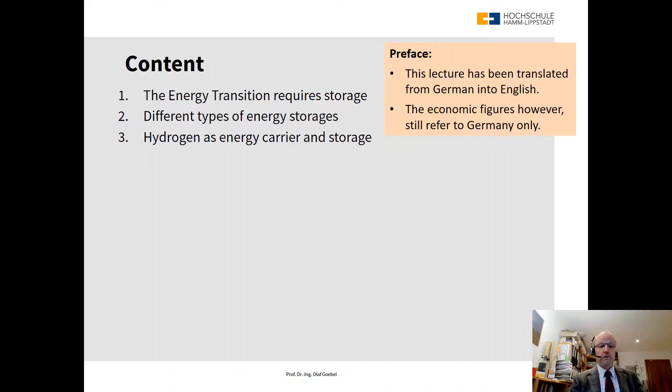So, to the content of this speech: first, we will see that the energy transition requires storage. We will look at different types of energy storage, at hydrogen as an energy carrier, the properties of hydrogen, the production of hydrogen, the utilization of hydrogen, road transport, the role of hydrogen in the energy transition, and the conclusion.

One important thing: I have translated this lecture from German into English because there was a request from my international friends that they would like to hear it in English. So I did the translation and will hold this lecture in English. However, the figures still refer to Germany only, meaning all the economic and technical figures use Germany as an example country. If you want similar data for your own country, unfortunately you have to dig out that data yourself.

All right, let's get started. The energy transition requires storage. Let's look at the net electricity generation in Germany in 2019: 513 terawatt hours was the net electricity generation, and almost 50%, 46%, came from renewables. The largest share came from wind, then biomass, photovoltaic, and hydropower. The remaining electricity generation was from natural gas, nuclear, lignite, and hard coal.

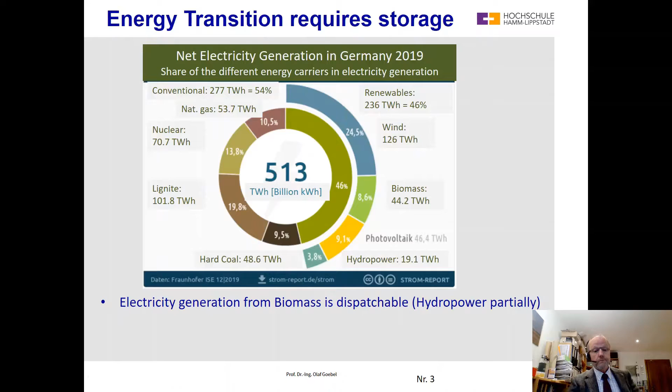Looking at the renewables: electricity generation from biomass is dispatchable. Hydropower is partially dispatchable - run-of-river plants are not dispatchable, but those with storage lakes are. Unfortunately, electricity generation from wind and solar is fluctuating, and only wind and solar have further potential in Germany. Hydropower and biomass don't have further potential because there is no additional area available for either.

So let's look at the different sectors of energy. We have electricity generation: of the gross electricity generation, we have 41% renewables. The traffic sector is 5.6% renewables, stagnating. Electricity generation is increasing every year, the percentage. Traffic sector is stagnating at 5.6%, and the heat sector is stagnating at 15%.

So here you see over the time from 1990 in the last 30 years how the electricity sector really picked up speed and is continuing to grow. In the year 2020, we already passed the 50% line with renewable electricity generation in Germany. But as you see here, traffic and heat sector are stagnating.

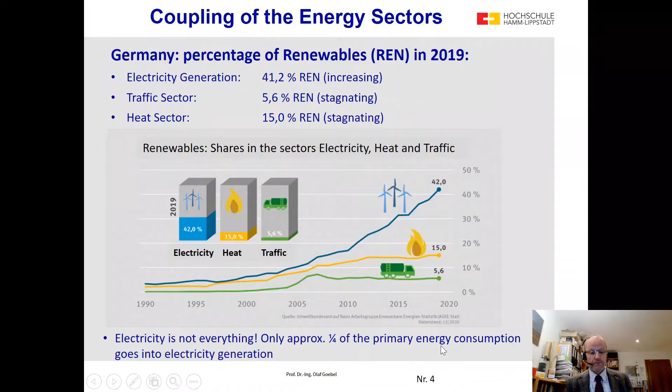So, electricity is not everything. Only approximately 1/4 of the primary energy consumption goes into electricity generation.

So let's look at the primary energy consumption of Germany. Here the renewables are not as big as they were in electricity generation only. If you look at the complete primary energy consumption of Germany, there were only 14% renewables, and the biggest share was oil, then natural gas, hard coal, lignite, nuclear.

Within the renewables, biomass was the biggest, which is biomass for heating systems - that means it's also including wood firing. Then here is the electric, which is wind, hydropower, and photovoltaic.

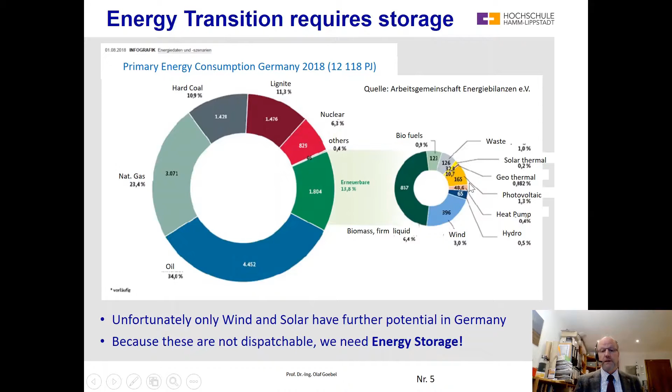As I said before, unfortunately only wind and solar have further potential in Germany. And because these are not dispatchable and they are fluctuating, we need energy storage. So energy storage is a must if we want to increase the share of wind and photovoltaic to significant percentages.

So let's have a look at some energy storages. I always notice that people have a little bit of trouble understanding what an energy storage is. A very simple energy storage is this little toy where you have to wind up a spring, and then this toy operates for a few seconds. This spring energy storage stores an energy of approximately 10 watt seconds, which is not a lot.

Then these typical rechargeable batteries, which we all know - in this example, it has 1.2 volt, 1.3 ampere hours, so 1.5 watt hours. But be careful when you compare this: this was watt seconds, and this is watt hours. So 1 watt hour is 3,600 watt seconds. In the end, this battery has 500 times more energy than this spring.

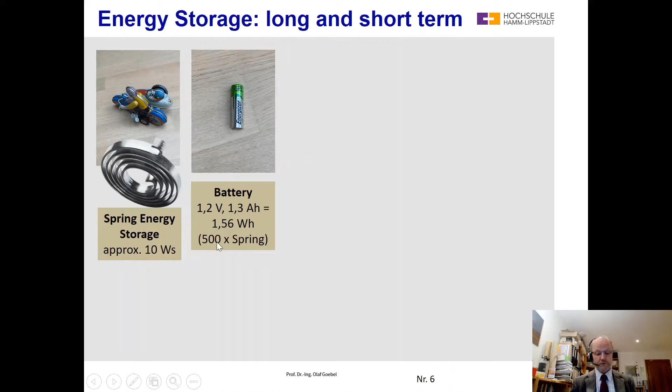I think this is pretty obvious because when you wind up such a toy, it runs for 10 seconds, and with a good battery, such a toy could really run for more than an hour. So this is why it has 500 times more energy than the spring.

Let's look into the next bigger system, a starter battery for a car. I think we still all know this system - these are the batteries used for starting our cars. This, for example, has 12 volt and 50 ampere hours, and volt times ampere is watt. So that means the energy content of this battery is 600 watt hours, or 0.6 kilowatt hours. This is again 384 times more than the previous battery.

Next step, we look into a fuel tank of this motorbike. Of course, the output of fuel is not directly electricity, but it is an energy storage. This tank fits 10 liters, and the energy content of 1 liter of fuel is approximately 10 kilowatt hours. When we have 10 liters, we have 100 kilowatt hours in this tank.

And let's look back to the battery - it had less than 1 kilowatt hour. That means we have 160 times the energy of the starter battery here in this tank. This shows, I think, pretty clearly why electric driving with lead acid batteries like shown here is not really an option. Imagine with 160 of these batteries, this motorbike would break together and couldn't run. By the way, going back to the spring, this is 36 million times the energy of the spring.

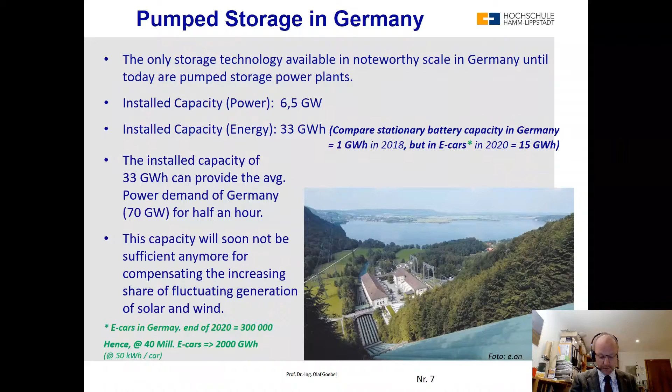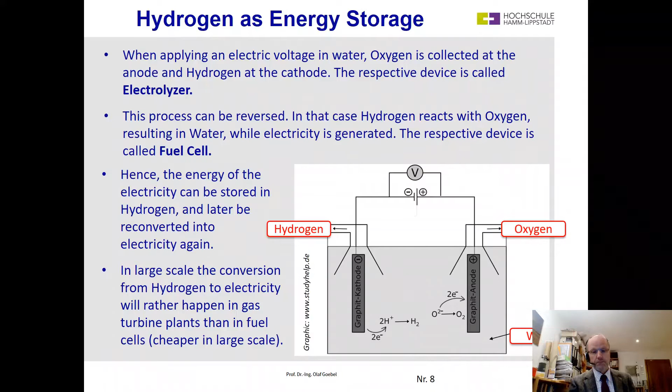So let's look at strengths and weaknesses of hydrogen as a storage. One big strength is the following: when you want to double the capacity of a battery, you either need 2 batteries or 1 battery of double size. The double battery has also a double price. Hence, a storage for a month is 30 times as expensive as a storage for a day.

This is different with pumped storage and with hydrogen storage. Here you don't need to increase the capacity of the inverter, but only the capacity of the energy storing medium, which is hydrogen or water. So at a pumped storage power plant, the pump and the turbines stay unchanged if you want to increase the capacity. Only the water pools need to be enlarged, and they are not the most expensive part of the plant.

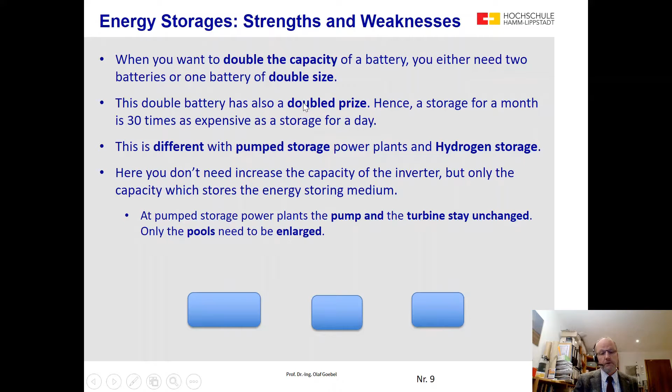So with batteries, if you want double the size, you need 2 batteries. If you want 30 times the size, you need 30 batteries. With pumped storage, you can keep the pump, you can keep the turbine, you only need bigger pools. And with hydrogen, the electrolyzer and the fuel cell or gas turbine stay unchanged—only the hydrogen tank needs to be enlarged.

So let's look at the system again. We have electricity, it goes through an electrolyzer, we receive hydrogen, we store it, then we take out the hydrogen, put it through a fuel cell, and we have electricity. Now if we want to double the capacity, we only need to increase the storage.

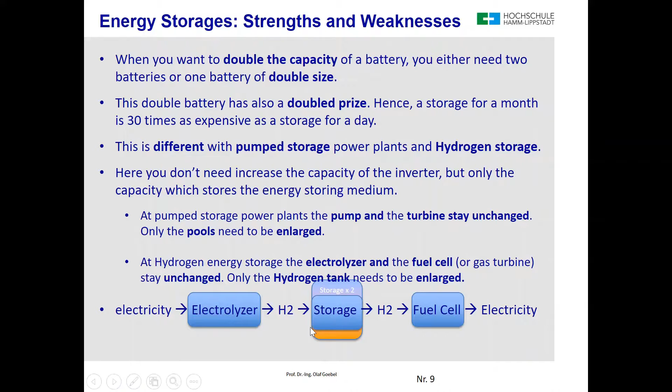And the electrolyzer and fuel cell stays the same. This is why this is so much cheaper for long-term storage, while batteries are not affordable for this. Now comes the disadvantage, the round trip efficiency.

Let's look first into liquid hydrogen, displayed as LH2. So we have a starting point, an electric energy of 100 kilowatt hours. We put this through a very good electrolysis with 75% efficiency, and then from the 100 kilowatt hours, we keep 75 kilowatt hours, which is a mass of 2.25 kilogram of hydrogen.

Then comes a liquefaction, and we need to liquefy this. We need 22.5 kilowatt hours electric, because approximately for liquefaction we need 10 kilowatt hours per kilogram. Since we have 2.25 kilogram, we need 22.5 kilowatt hours electric. Then we have 75 kilowatt hours in liquid hydrogen.

So then we want to reconvert it into electricity. We put this through a fuel cell, or through a combined cycle gas turbine with an efficiency of 60%, which is state of the art. Then 60% of 75 kilowatt hours is 45 kilowatt hours electric. So then we have 45 kilowatt hours.

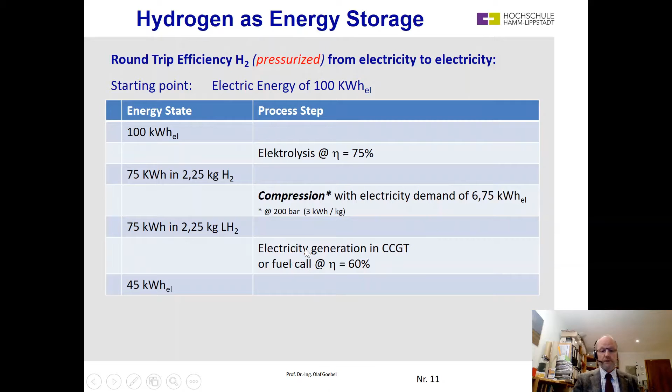And now we compress it to 200 bar. To compress hydrogen from 1 bar to 200 bar, we need approximately 3 kilowatt hours per kilogram. That means in total 6.75 additional kilowatt hours of electricity. So then we have compressed hydrogen, and we reconvert it into electricity like before, and receive 45 kilowatt hours electric.

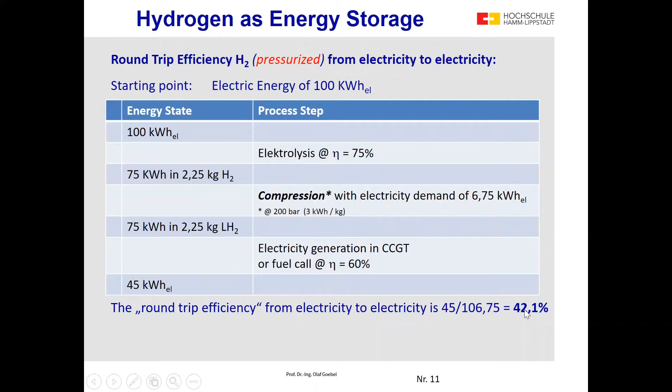And now the round trip efficiency is better because we still get out 45, but our input is lower. Our input was 100 kilowatt hours plus 6.75, and so the round trip efficiency is 42%. But it is still significantly worse than pumped storage or compressed air storage.

So let's look at the general properties of an energy storage system. The three most important properties are the following. First, power: with which power, measured in kilowatt, we can charge and/or discharge our storage. Then energy storage capacity: how much energy, how many kilowatt hours, can we store? And then the round trip efficiency: it describes how much of the original energy is still available after the storage cycle, into the storage and out of the storage.

With some technologies, the first two properties are connected with each other, for example with batteries. That means when you have a higher power, usually you also have higher storage capacity. With other technologies, this is not connected, as we saw before with pumped storage or hydrogen. That means here we can increase the storage capacity without touching the power, and this is why we can increase the storage capacity at very low cost, while with batteries, a bigger storage capacity brings us, if we want it or not, also an additional power.

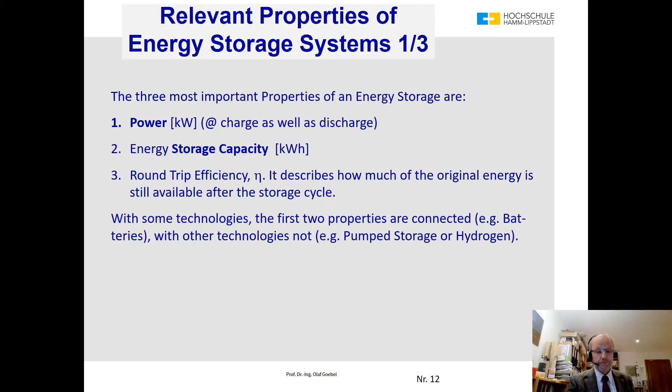So other further important properties of energy storage systems are the cost, of course, power specific: how much euro per kilowatt of charge or discharge power. The cost of energy, that means capacity specific: euros per kilowatt hour of storage capacity. Then, of course, the working lifetime. There are two parameters: one is the lifetime in years, and the cycle durability, how many cycles can the battery survive.

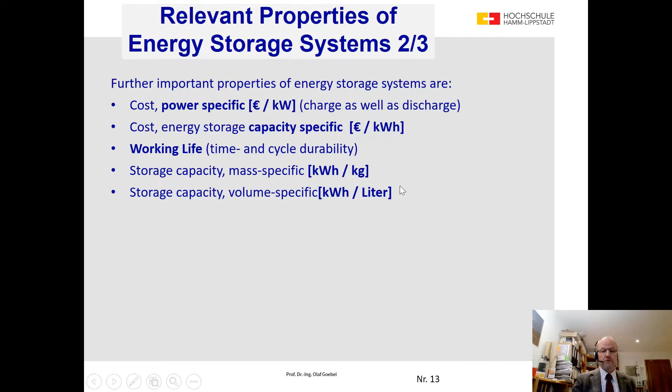Then, which is especially important for transportation systems, the storage capacity mass specific: how much energy can we store per kilogram of battery or storage system? And then volume specific: kilowatt hours per liter of battery volume. So these two are especially relevant for transportation systems, in cars and trucks.

The ratio of energy storage capacity to power determines the application as a short or long-time storage. The following list shows different storage technologies sorted according to their duration in ascending order.

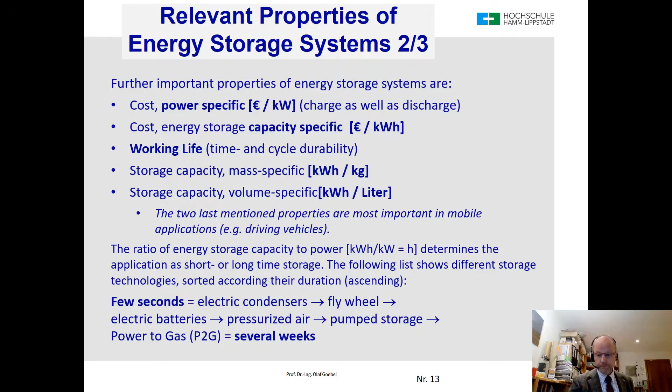So let's look at pumped storage. It has a round-trip efficiency between 70 and 80%. The lifetime is very long, 50 years plus. The price per kilowatt is around 1200, and the price per kilowatt hour can be as low as 20.

The costs are strongly dependent on the local geographic conditions, for example existing lakes. The first pumped storage plant in the world was built in Bavaria in 1924. It had two natural lakes where they only had to build the turbine, pumps, and pipes. Of course, in such a system, it can be pretty cheap.

In some other places you have to build one of the reservoirs, which makes the system expensive, and that's why the cost here is higher than 20. But 20 applies to those plants with very good boundary conditions. So remark: this is definitely state of the art.

Pressurized air, when done adiabatically, has 75% efficiency, which is pretty good. Lifetime is also pretty high. The cost per kilowatt is comparable to pumped storage, but the price per energy is definitely higher. There are prototypes, but they are not yet state of the art.

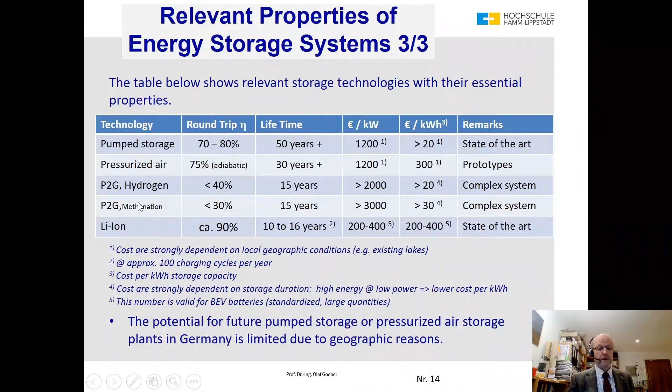So these are the future systems: hydrogen, lithium-ion batteries, maybe future batteries which are coming up soon. There is a lot of research going on now. Or we have power to gas with the methane conversion.

Now let's look into hydrogen itself. This was a little bit of a quick opener into what we can do with hydrogen, but we now look deeper, because hydrogen is the main topic of our today's lecture. So why is hydrogen an interesting energy carrier?

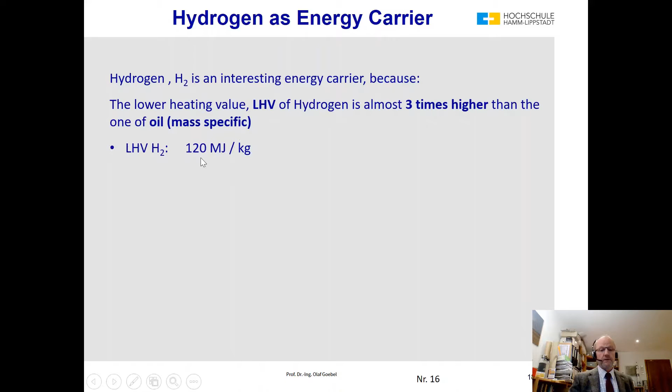Because the lower heating value of hydrogen is almost 3 times higher than the one of oil, mass specific. The lower heating value of hydrogen is 120 megajoule per kilogram. The lower heating value of oil is 42 megajoule per kilogram. Therefore, it is particularly interesting for fuels, for vehicles, because the energy density of hydrogen is higher than that of oil. However, at the end, this advantage is overcompensated by the very heavy tanks needed for pressurized storage. We will also see this later.

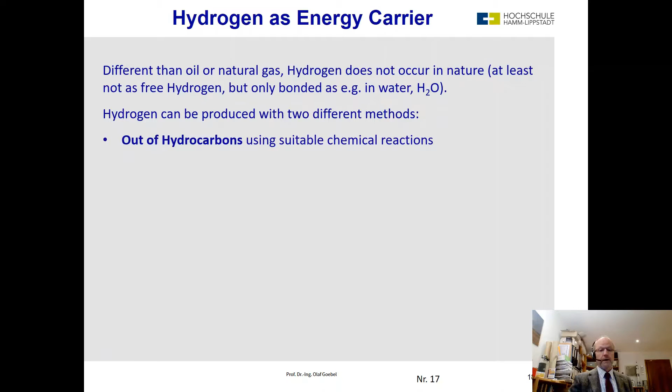There's a very big difference between hydrogen and oil or gas. Different from oil or natural gas, hydrogen does not occur in nature as free hydrogen, only bonded, for example like in water, which is H2O. Hydrogen can be produced with 2 different methods: out of hydrocarbons using suitable chemical reactions, usually with natural gas, or out of water using electrolyzers, which we learned before. However, the share of worldwide hydrogen production with electrolyzers is less than 5%. The majority is still produced with hydrocarbons.

In some chemical processes, hydrogen is generated as a byproduct. For example, the coking process, where hard coal is converted into coke, hydrogen is a byproduct which you should of course catch and use. So it is important to note that hydrogen is not an energy source like oil and gas, which you find ready to use in nature. It is an energy carrier, which you have to produce from another energy source.

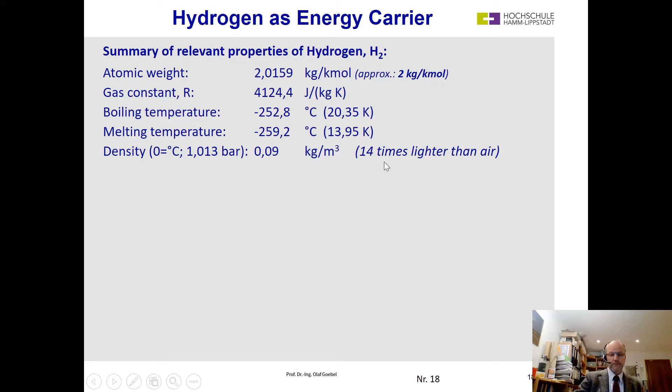So, summary of relevant properties of hydrogen. The atomic weight of H2 is approximately 2. The gas constant is 4124. The boiling temperature is minus 252.8 Celsius, or 20.35 Kelvin. So it's very low. The melting or freezing temperature is 13.95 Kelvin. The density at 0 degrees Celsius and normal atmospheric pressure is 0.09 kilograms per cubic meter, which is 14 times lighter than air. This is why Zeppelins or airships have been flying with hydrogen. The density in the liquid state is 70 kilograms per cubic meter, which is 14 times lighter than water. So it is a very low density liquid.

The heating value is 120 megajoule per kilogram, or in the unit we use more often in the energy business, kilowatt hours. You divide this by 3.6 and get 33.33 kilowatt hours per kilogram, lower heating value. For the volume specific heating value, it is 3 kilowatt hours per normal cubic meter. This N is not a Newton cubic meter, it is a normal cubic meter, which is the volume at ISO standard conditions, that means 15 degrees Celsius and normal atmospheric pressure, as written here. The volumetric heating value in the liquid state is 2.36 kilowatt hours per liter. So you see it is approximately 1,000 times denser than uncompressed gas.

Due to the fact that the volume specific heating value is 787 times higher in the liquid state than in the gaseous state, liquid hydrogen is used as a fuel in spaceflight. So in spaceflight, you use the fact that it has almost 1,000 times higher density. This is why you fill up the tanks of rockets with liquid hydrogen.

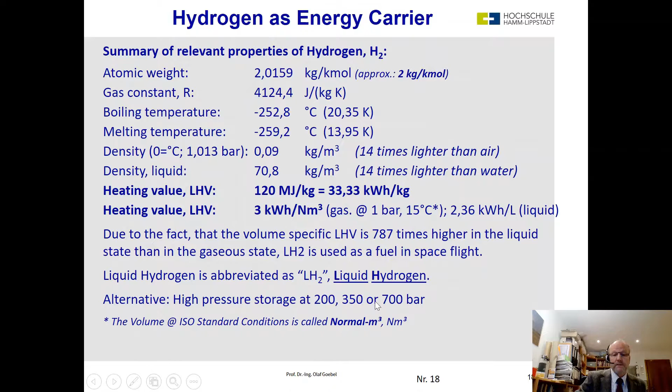Liquid hydrogen is abbreviated as LH2. An alternative is high pressure storage, with common pressure ranges of 200 bar, 350 bar - this is for transport, in tanks of trucks and buses - and 700 bar, which is used in tanks of passenger cars. This has been established as a normal pressure.

So what is the role of hydrogen during the energy transition? The energy transition means the move from the carbon-based system to a renewable energy-based system. As shown above, hydrogen is an energy storage and cannot score in all categories due to its low round-trip efficiency.

However, the energy economy will have to use hydrogen as an energy carrier in the future for the following reasons. Batteries do have a much better round-trip efficiency, but at very large capacities, they are capacity-specific more expensive than hydrogen. That means batteries are not suited as a seasonal storage.

A seasonal storage is a storage which you charge up once per year and discharge once per year. For example, with solar energy, which has a big surplus in summer, you put all this surplus energy into this storage. And then in winter, when the sun is not shining, you discharge this storage.

A battery, which you only charge once a year, is too expensive, because if a battery has a lifetime of maybe 20 years, this battery is working only 20 times, and the high investments need to be paid on the kilowatt hour which is stored there. So that doesn't work, and this is why hydrogen is the only suitable seasonal storage.

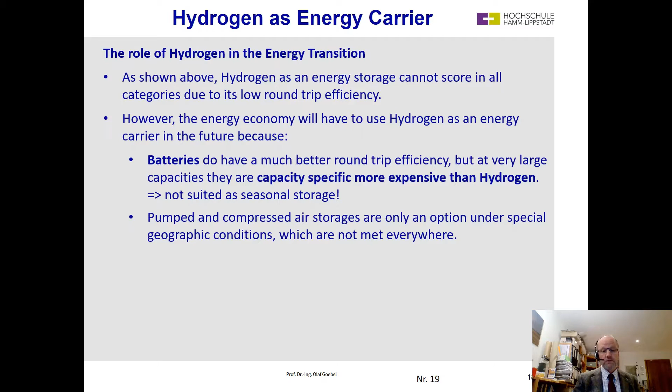Pumped and compressed air storages are only an option under special geographic conditions, which are not met everywhere. One of the best countries for this is Norway, with a lot of water and a lot of mountains. Also Austria and Switzerland are pretty good, as well as the Rocky Mountain area in the United States. But there are many, many places where pumped storage doesn't work.

Due to the fact that in Central Europe the dominant renewable energies, PV and wind, are highly fluctuant, there will be more and more electricity surplus during the summer as the renewable installation rate increases, which it is doing now. This surplus can be used for long-term seasonal storage. The surplus electricity will be cheap, therefore the low efficiency of hydrogen does not hurt as much as it seems at first sight.

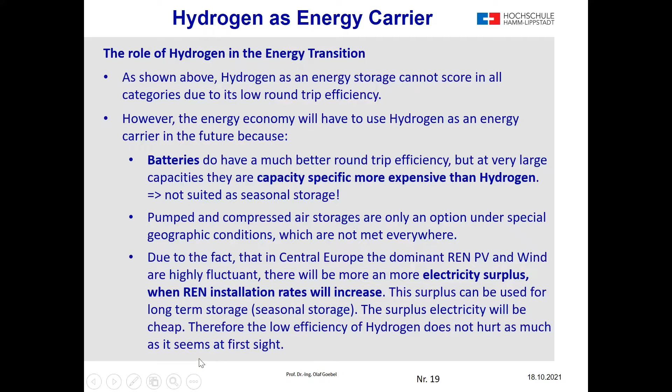So let's continue the role of hydrogen in the energy transition. There will be a certain order in the utilization of surplus electricity. So when we continue to build PV and wind, we will have more often surplus electricity. What can we, or what shall we, do with it?

First is demand side management. This means we need to incentivize electricity utilization in times of surplus, and penalize it in times of scarcity. This way, when there is cheap electricity on the market, people will buy this cheap electricity, and when electricity is scarce, you make it expensive, so the demand will go down. This is the easiest way of using the surplus, but of course you cannot manage all the surplus with it.

The next one is charging of batteries. If all 40 million passenger cars in Germany will be battery electric vehicles with 50 kilowatt hour capacity each, then the total battery capacity will be 2000 gigawatt hours, which represents 28.5 full load hours of the total Germany electricity consumption. So that is for the daily loops.

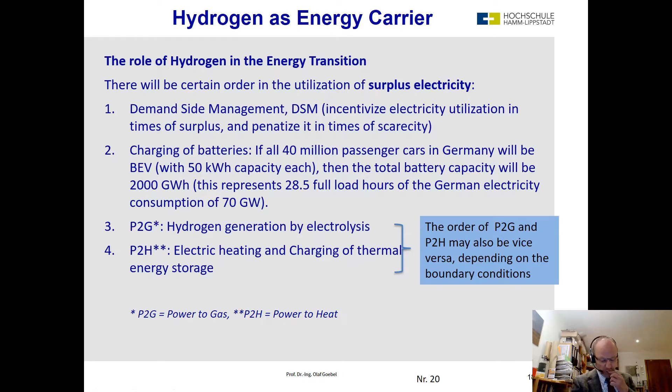Then we have power to gas, hydrogen generation by electrolysis. That means when demand side management has been applied and there is still a surplus, you charge the batteries, and when there is still a surplus, you use the surplus electricity to produce hydrogen with electrolyzers. Or you can use electric energy for heating - we will come to this later. The order here, whether power to gas or power to heat comes first, is discussable, and we will discuss that later during this presentation.

Now comes an important thing, the hydrogen generation costs, abbreviated HGC. The hydrogen generation costs consist of three components: capital cost of the electrolyzer and the complete plant, including the compressors and so on, called CAPEX; then the cost for operation and maintenance, also abbreviated O&M, called OPEX; and the cost of electricity, which we need for the electrolysis. These are the three components.

So the capex is distributed over the depreciation period using the annuity method. That means the interest and payback are in constant rates over the lifetime of the components. The OPEX will be assumed as 2% of the capex per year. This is the typical value for this kind of infrastructure by experience.

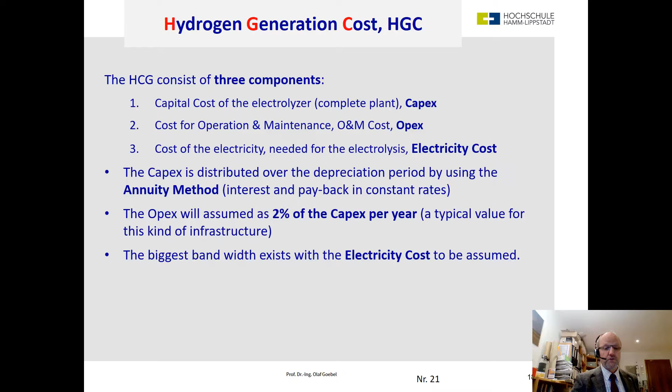The biggest bandwidth exists with the electricity generation cost, because here we can assume really low values or high values. So we will just start with an example, and later we will discuss these numbers, which are realistic and which should be used, because that is not so easy. So let's start and make some assumptions.

So the capex of the complete electrolyzer, the complete plant in large scale, this is not the home-based stuff, this is an industrial electrolyzer, costs 1,000 euro per kilowatt capacity. And with an efficiency of 70%, this produces a certain amount of kilogram of hydrogen per hour. This is also a very common way of displaying the price: 1,000 euros per kilowatt is 48,000 euros per kilogram per hour capacity.

The OPEX, as I said before, is 2% of the capex per year. This is a non-variable OPEX. And for electricity cost, we take an example of 4 cents per kilowatt hour, because this is the average value at the European Electricity Exchange in the years before 2019. It was not last year, since it was very low due to the Corona pandemic. So we take this as an example.

Then we start with full load hours, 4,000 hours per year. And we have some finance parameters: a return on equity of our project of 12%, a debt rate of 4%, a debt equity ratio of 80-20. That means we have a weighted average cost of capital, so-called WACC, of 5.6%. And we have a depreciation period of 20 years.

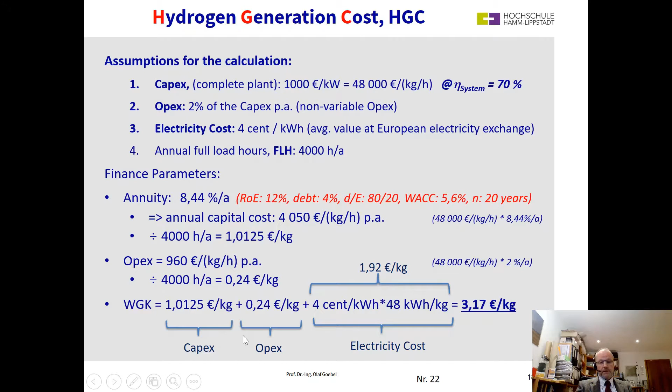And now we add up all the stuff. So the CAPEX plus OPEX plus the electricity cost together is 3 euro and 17 cents per kilogram of hydrogen in our example. So I copy the last line to start the discussion of the hydrogen generation cost. So is that expensive or not? Let's compare it with other stuff.

So hydrogen produced from natural gas with the so-called steam reforming is 1.5 euros per kilogram. And now we convert this to energy. When we remember that the energy content of 1 kilogram was 33.3 kilowatt hours, we can convert this price into a kilowatt hour price, and this is 9.5 cents per kilowatt hour. The hydrogen produced from natural gas here then is 4.5 cents per kilowatt hour, so a little bit less than half.

But now let's compare it with other fuels. For example, diesel fuel. Diesel fuel was in the beginning of the year here in Germany, now it is even more expensive, 1.20 euro per liter.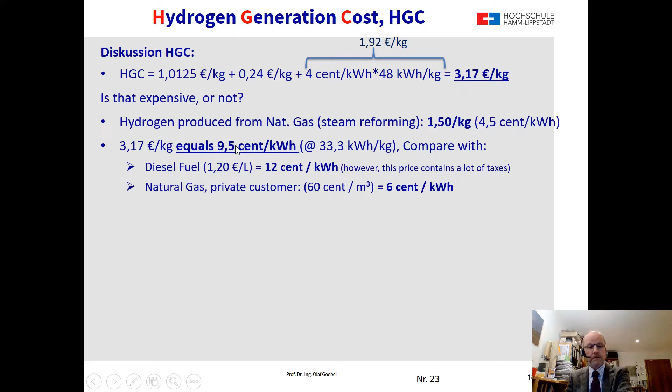Technology engineers know that 1 liter of diesel fuel has an energy content of 10 kilowatt hours. That means the diesel price per liter is 12 cents per kilowatt hour, comparable to our hydrogen price, but this price contains a lot of taxes. Natural gas for a private consumer in Germany is 60 cents per cubic meter, or 6 cents per kilowatt hour, so cheaper than this hydrogen. Natural gas for the industrial consumer is 25 cents per cubic meter, or 2.5 cents per kilowatt hour, much cheaper than our hydrogen produced with an electrolyzer. So conclusion: the hydrogen of the example calculation is cheaper than diesel fuel, but more expensive than natural gas.

However, we should consider that the electricity for the electrolyzer cannot be obtained at the exchange price of 4 cents which we had before. Including grid fees and other contributions, the price will rather be 12 cents per kilowatt hour. So the cheapest price for industrial users of electricity in Germany is 12 cents, because you have to pay certain taxes and fees. If we take this into our calculation, the 12 cents instead of 4 cents, then this fraction here will triple, because 12 is 3 times 4. That means from almost 2 euros to then 6 euros, so almost 4 euros more. This is why we are now at 7 euros per kilogram.

And this is 21 cents per kilowatt hour, even more expensive than diesel fuel. This shows us that we have to make sure that all the electric energy needs to be freed up from all the fees and taxes. Otherwise, hydrogen production with an electrolyzer won't work. And then the transport cost to the consumer will have to be considered as well. We will come to that in a minute.

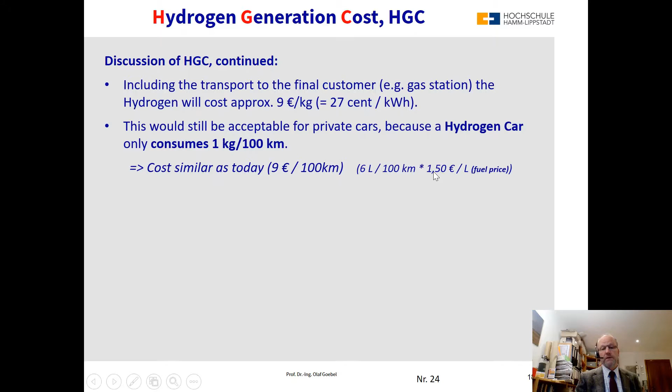So let's say 9 euros per kilogram, and we need 1 kilogram, that means we have 9 euros for the distance of 100 kilometers. With the gasoline car, we have 6 liters, but we pay 1.50 euro per liter of fuel, so 6 times 1.5 is also 9 euros. That means the fuel price is, for passenger cars, kind of acceptable.

However, 9 euros per kilogram would not be acceptable for electricity generation. For example, a combined cycle gas turbine plant using this fuel at this price would achieve electricity generation costs of 47 cents per kilowatt hour. How did I calculate this? I assumed a capex of 800 euro per kilowatt for the power plant, an efficiency of 60%, and 4,000 full load hours, which are all typical figures for a combined cycle gas turbine plant. And do you know what is the electricity generation cost by natural gas? It is in the range of 5, 6, maximum 7 cents per kilowatt hour when we run with today's gas prices. You see that when we say 7 cents with gas, this one is 7 times more.

So this is killing, we cannot use this hydrogen at this price for producing electricity. Nobody would buy this electricity because it is too expensive. So a very important takeaway is the electricity for the electrolyzer has to be exempted from all fees, duties and taxes. Otherwise, the resulting hydrogen would be too expensive for almost all applications. This is a very important message to politicians who try to deal with the topic of hydrogen.

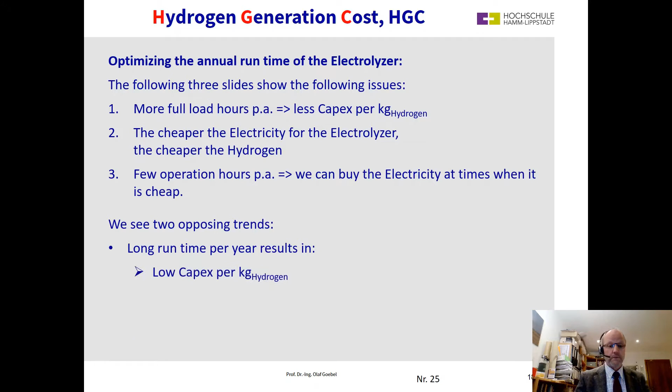So we see two opposing trends, and this is a difficult thing. A long runtime per year results in low capex per kilogram of hydrogen, but higher electricity cost, because when you have a long runtime, you also need to buy expensive electricity. That means there shall be an optimum runtime for minimum hydrogen generation cost, and this we will try to find.

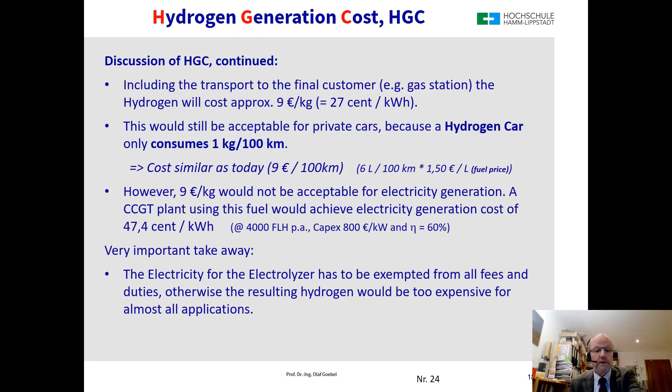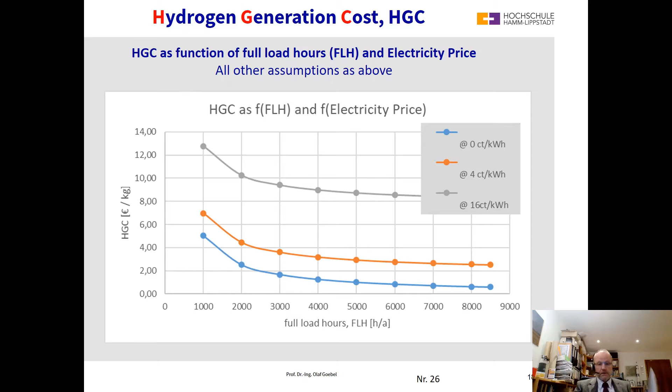Then we said this is eventually not realistic. The cheapest price to get electricity, with all the taxes and stuff we have in Germany, would be 16 cents, and then this would be our hydrogen costs, which would be killingly high. And then there is another problem with this graph: as I said before, we don't have a constant price of electricity over the year. The price of electricity depends on the utilization, and that we will look at in the next two slides.

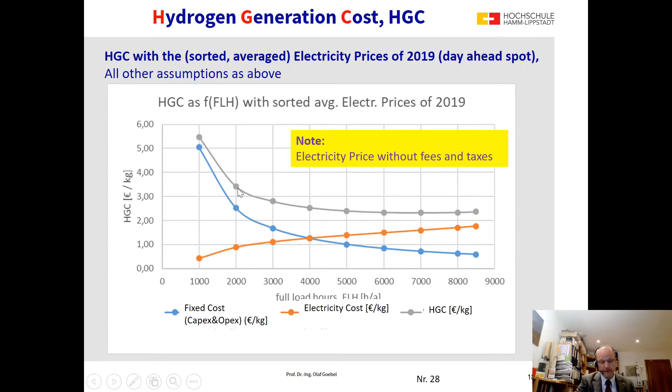The last topic we look at for hydrogen generation is water consumption, because sometimes people say, wow, if everybody wants to produce hydrogen from water, maybe we run into a water shortage. So let's take a look at this.

The water demand for hydrogen generation can easily be calculated by the ratio of atomic weights. The mass of water divided by the mass of hydrogen is 18 to 2, because water is H2O, with the atomic mass of O being 16 and H2 being 2. So the water molecule has a weight of 18, and the hydrogen H2 molecule has a weight of 2. The ratio is 18 by 2, or 9 to 1.

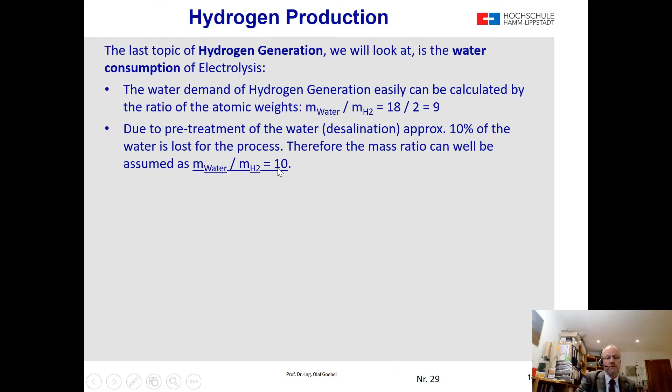Due to the pre-treatment of water, desalination and so on, approximately 10% of the water is lost for the process. So the mass ratio can be well assumed as mass of water per mass of hydrogen of approximately 10 to 1. That means for the production of 1 kilogram of hydrogen, we need 10 kilograms of water.

A large-scale electrolyzer with a power of 20 megawatts, which we are currently planning to build here in Hamm as a pilot project, produces approximately 400 kilograms of hydrogen per hour. Hence it will consume 10 times more water, that means 4,000 kilograms, or 4,000 liters of water per hour. But water in large quantities we don't measure in liters, we measure in cubic meters. So that's 4 cubic meters per hour.

This is not a lot. The river flowing through our town here, called the Lippe, has an average flow rate of 20 cubic meters per second. That means it is 18,000 times more than the electrolyzer will consume. So this is definitely not an issue.

Even an electrolyzer of 1 gigawatt would consume 200 cubic meters per hour, which is only 0.3% of the water of the river, so it is still nothing. Why do I say 1 gigawatt? Because we have a large-scale coal-fired power plant here at the river with a capacity of approximately 1 gigawatt. If we used all the electricity of this large plant to produce hydrogen, we would consume 200 cubic meters per hour, and the river delivers 20 cubic meters per second. That means within 10 seconds, the river could deliver the water we need for the full hour. So this is definitely not an issue. Bottom line: the water consumption of hydrogen generation is absolutely uncritical.

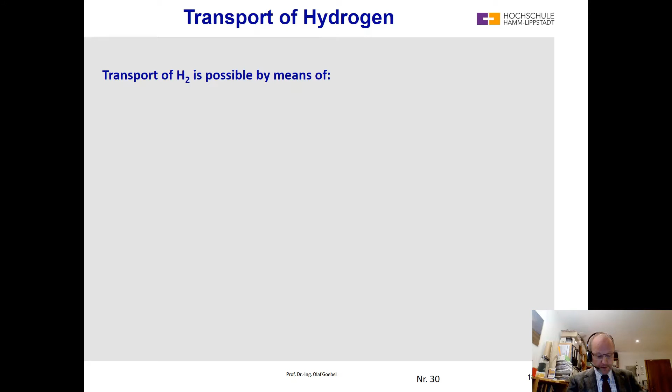Let's look into the next topic: transport of hydrogen. Transport is possible by means of pipelines. Pipelines can only be used for gas state, not liquid, because liquid would start to boil, as liquid hydrogen has to be very cold, at 20 Kelvin or minus 250 Celsius. In a pipeline, this liquid hydrogen would start boiling, creating a two-phase flow, which is not possible in pipelines. So you have to transport it in the gas state.

Since the 1930s, the industrial area of the Ruhr has been connected with the city of Cologne by a hydrogen pipeline. This gas pressure is 25 bars, and the length is more than 100 kilometers, and it has been running for 90 years now without major damages. It even survived the Second World War, where a few bombs hit the Ruhr area, as most of you might know. Then we have vehicle transport, either in gas state or liquid. In vehicle transport, liquid transportation is possible, especially for long distance transport.

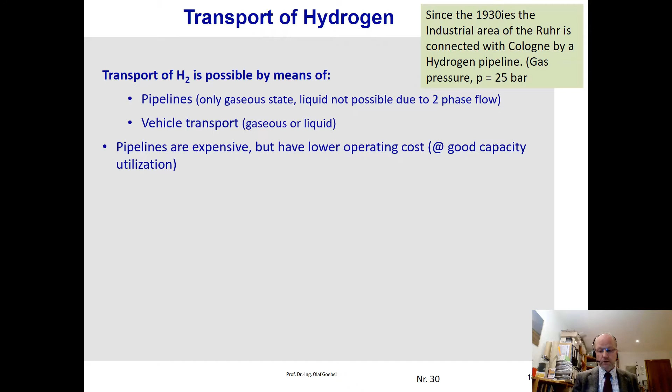Pipelines are expensive, but they have lower operating cost at a good capacity utilization. That means when you make sure that you have a pipeline operating all day long with a lot of flow, then pipelines are good. But when you operate them only a few hours per day, they are too expensive and you rather go for trucks.

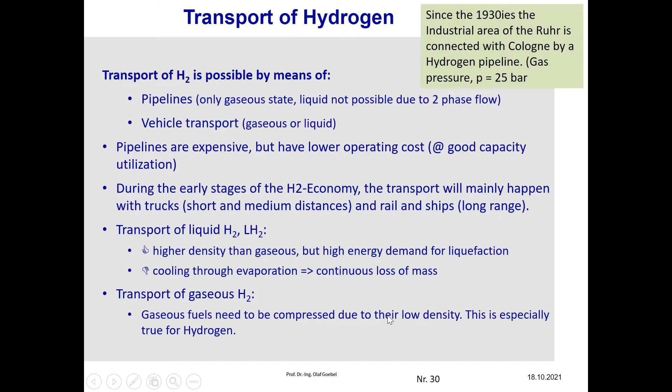Let's look into pipelines, transport of hydrogen compared to natural gas. The pressure loss equation is that the pressure loss is the density, half times the velocity squared, times the friction coefficient times the length, divided by the diameter. The density of natural gas and hydrogen has a ratio of approximately 8:1, and the heating values of natural gas to hydrogen is 3:8. That means at the same pressure loss, the pipeline can transport 94% of the energy which could be transported with natural gas.

Because this is very often asked, people think that hydrogen pipelines can transport much less due to the fact that the density is much lower. But you see there are two opposing effects. Because the density is so much lower, this pressure loss factor is also lower. That means you can use a higher speed due to this, the square root of 8 times higher speed. And then, transporting with the same mass, you transport more energy. These two effects lead to a factor of 94% of the energy being transported.

However, the flow velocity is square root of 8 times higher, and that means the power of the compressor will be 2.8 times higher. For example, the Nord Stream pipeline, a very famous pipeline here in Europe, consumes approximately 2.5% of its energy flow for gas compression. With hydrogen, this would be 7%.

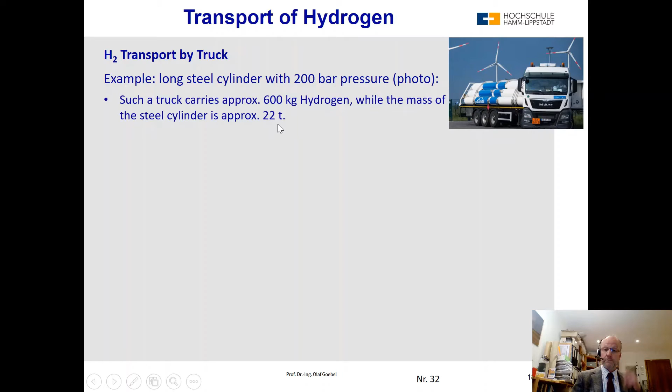Now let's have a look at the trucks. The typical way to transport it in trucks is a long steel cylinder with 200 bar pressure. You see here a typical photo of a typical truck. Such a truck carries approximately 600 kilograms of hydrogen, while the mass of the steel cylinders is approximately 22 tons. That means this truck is mainly driving around with steel tanks — 22 tons of steel tanks carried around, and only 0.6 tons of hydrogen.

Compare: a fuel tank truck transports 25 tons of fuel. That is 41 times more mass than hydrogen, and 15 times more energy. These typical road tankers with oil in them transport 15 times more energy than a truck which brings hydrogen. And then very often I hear, why don't you double the pressure?

But doubling the pressure would not improve the ratio of hydrogen to steel. With doubling the pressure, the mass of hydrogen would be doubled. But the wall thickness would need to be doubled as well, because you have higher stress on the steel - hence the tank mass ratio. That means the tank mass would double as well, and the steel-hydrogen ratio is the same. Even worse, because of...

With these high pressures, you cannot consider hydrogen as an ideal gas. Theoretically, with the theoretical equation, the density of hydrogen at 200 bar would be 16.26 kilogram per cubic meter. In reality, it is 14.5. That means you are already 11% worse. If you go to 350 bar, which is a typical pressure in a truck tank, you are already 18% beyond the theory. And at 700 bar, the typical pressure of a passenger car, you are already 31% beyond the theoretical density. That means going to very high pressures in transport doesn't solve the problem.

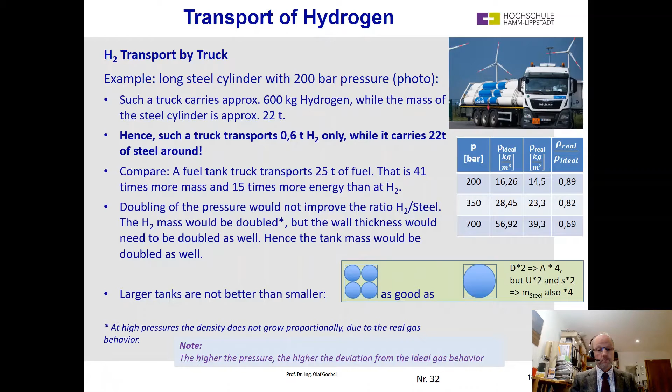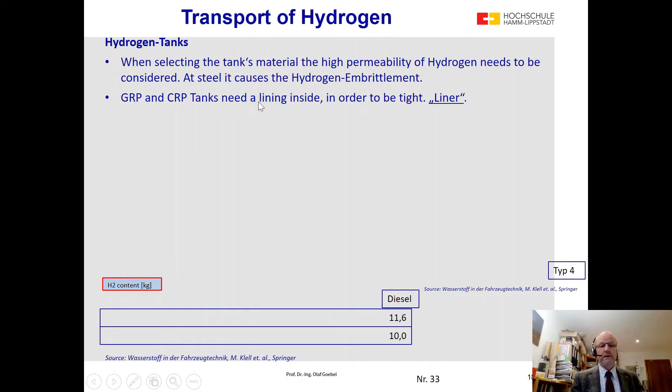So then we look into different hydrogen tanks. When selecting the tank's material, the high permeability of hydrogen needs to be considered. With steel, it also causes hydrogen embrittlement - pure steel tanks become brittle over time, and that is not good. After a few years, you need to exchange them. So glass fiber reinforced plastic or carbon reinforced plastic tanks are better, but they need a lining inside in order to be tight - this is called the liner.

So let's look into the typical tank classifications. A Type 1 tank is a normal steel tank, shown here with a steel wall. Type 2 is like this, but it has a carbon reinforced plastic cover to make it stronger, for when you want to go to very high pressure. Or Type 3, where all the stability comes from the carbon reinforced plastic, and you only have a steel or aluminum liner inside because the CRP wouldn't be tight. On Type 4, all the stability comes from the carbon reinforced plastic, and the inside liner is plastic - this is used nowadays in cars.

This photo shows a typical Type 4 tank - you see with the carbon here, the Type 4 tank. And here let's look at some tank examples: Type 3, Type 4. So the last 4 columns are for the Type 4.

And these are for trucks with a pressure of 350 bar and 700 bar. This is a typical car tank, and here we have the content in kilogram. The column at the most right is a typical car tank - it has a content of almost 5 kilograms. As we learned before, a passenger car needs approximately 1 kilogram of hydrogen per 100 kilometers. It means this car would have a range of 465 kilometers. So this is a typical tank for a car.

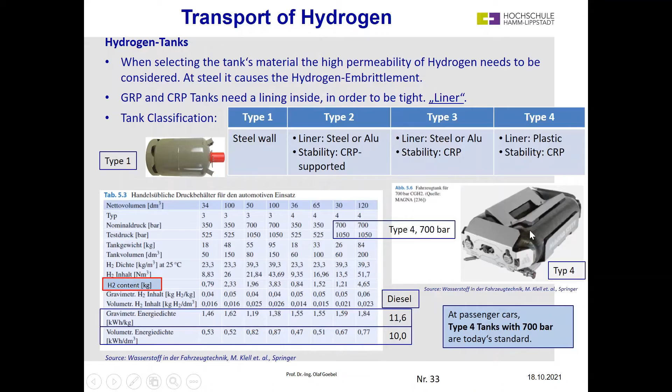Summary of transport. Pipelines: only pressurized gas, no liquid hydrogen. High investment, low operation cost. Only economic at high utilization. You can mix hydrogen into natural gas pipelines, so 5 to 20% volume share is definitely possible.

Then come to transport in vessels. Liquid hydrogen has a high density, but high energy demand for liquefaction. Pressure tanks are available at the following pressure levels: 200, 350, and 700 bar. Above 200 bar, you have tank type 3 or 4. In passenger cars, you have type 4.

Relatively new is the binding of hydrogen in organic carrier media. There's an advantage: it has a higher energy density. The disadvantage is you have energy demand for binding it into the organic carrier. Bottom line, a truck only transports 1 ton of hydrogen instead of 25 tons of oil. That is 25 times less mass and 9 times less energy than with a road tanker, which brings gasoline, diesel, or heating oil. So transport costs of hydrogen will be significantly higher than with oil.

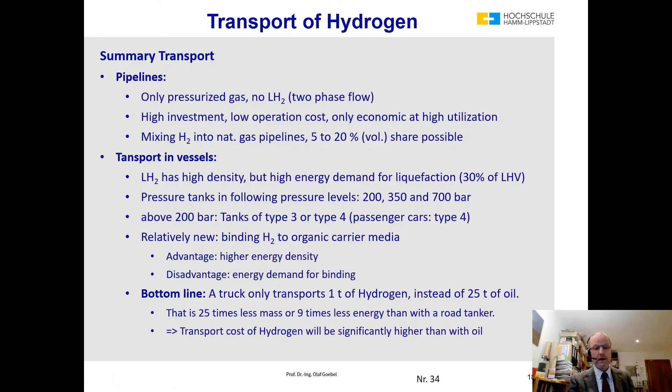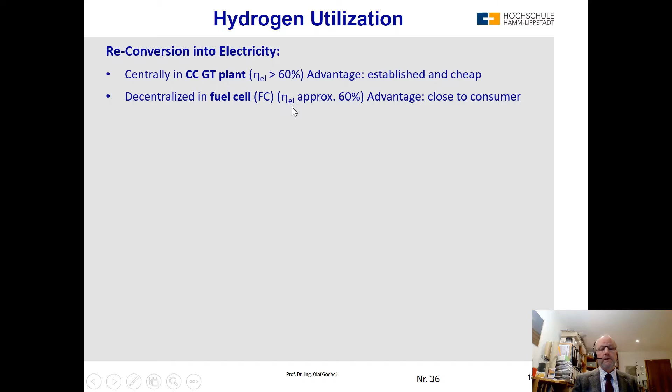Next topic is the utilization of hydrogen. One is the reconversion into electricity. You can do it centrally in a combined cycle gas turbine plant; efficiency is above 60%, advantage is it is established and cheap. You can do it decentralized in a fuel cell; efficiency is the same, advantage is you are closer to the customer.

And this is a cornerstone of the energy transition. The reconverted electricity will be needed in times without wind and solar energy. That means beyond a certain share of renewables, you can't live without hydrogen. Nowadays in Germany, we make almost 50% of our electricity from renewables. So far, it is working without hydrogen storage because when there is no sun and no wind, we burn gas or coal. But when we want to go to 80 or 90% share, we have to reduce the gas and coal to a minimum. Or even if we want to go, as we want to do in the year 2045 in Germany, to zero carbon electricity production, then we need to produce all the electricity, even if there is no wind and no sun, with renewable energies. And this can only be done with hydrogen, which has been produced from renewable energies.

And the hydrogen demand for this long-time storage will be higher than in the transport sector in the long run, just to make this clear.

Then the utilization in industrial processes. Steel production, for example, hydrogen can be used as a reductive instead of coke. It has been shown in pilot plants, and there are plans to use this on a large scale.

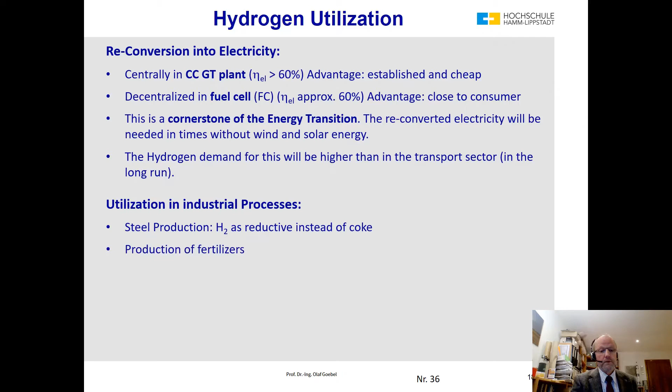Then the production of fertilizers needs hydrogen already today. The hydrogen consumption in Germany is today approximately 19 billion normal cubic meters, with an energy content of 57 terawatt hours. If you would produce this hydrogen with electrolyzers at an efficiency of 70%, you would need more than this amount - 81 terawatt hours of electricity consumption for producing the hydrogen already needed today in Germany. This would be 13% of Germany's total electricity consumption.

That means there is an immediate demand for this amount of hydrogen, which consumes this amount of energy. And that means as long as this is not satisfied, you don't really need to look for other consumers, because these consumers are eagerly waiting for the green hydrogen.

So yeah, very important, I have not talked about this before. We only talked about the reconversion into electricity and so on. Even when the industrial utilization is only mentioned on one slide in this presentation, it will be the first one which will work without subsidies, because here the hydrogen is definitely needed and there is no alternative.

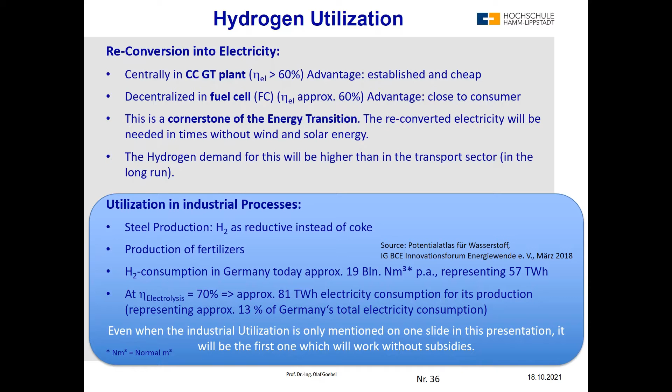But now let's look into the utilization in passenger cars. A passenger car can be hydrogen powered in two ways: an electric motor with electricity from a hydrogen fuel cell, abbreviated here with FC, fuel cell, and then a combustion engine with hydrogen as a fuel.

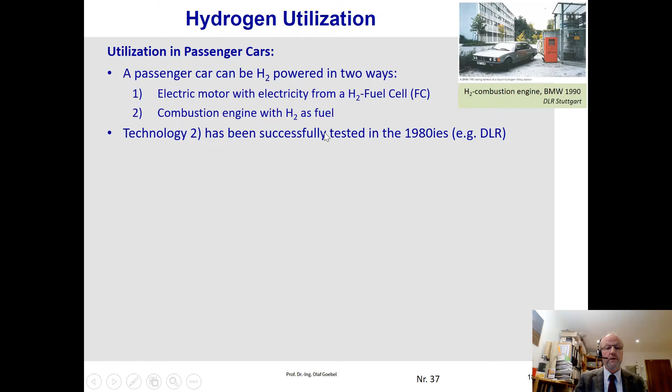This technology has been successfully tested in the 1980s when I worked at the DLR. This was a BMW which we had at our institute. Here was a refuel station, and it was fueled with liquid hydrogen. It had a liquid hydrogen tank, and it didn't have a fuel cell. It had a combustion engine, which was running on hydrogen. It was running pretty well, actually.

So technology one only became feasible with the progress in fuel cells since the end of the 1990s. In the 1980s, such a fuel cell was not available, but since the end of the 90s, such fuel cells are available, and modern hydrogen cars like the Toyota Mirai, for example, convert hydrogen into electricity with the fuel cell.

The advantages of a fuel cell against a hydrogen combustion engine are the following: better efficiency, 60% efficiency instead of 30 to 50% in a combustion engine. And you can have the recuperation of energy from braking. So when you brake with such a car, the electric motor switches into generator mode and produces electricity, which is fed back into the battery. That means when braking, you don't lose the energy - you get it back and can put it into the battery. With the combustion engine, you wouldn't be able to do that.

Typical consumption of hydrogen cars: in a modern fuel cell passenger car, it's 1 kilogram of hydrogen per 100 kilometers. In a combustion engine, it's between 1.5 and 2 kilograms per 100 kilometers - significantly worse than what we did here 30 years ago. But it was possible already 30 years ago to drive a car with hydrogen.

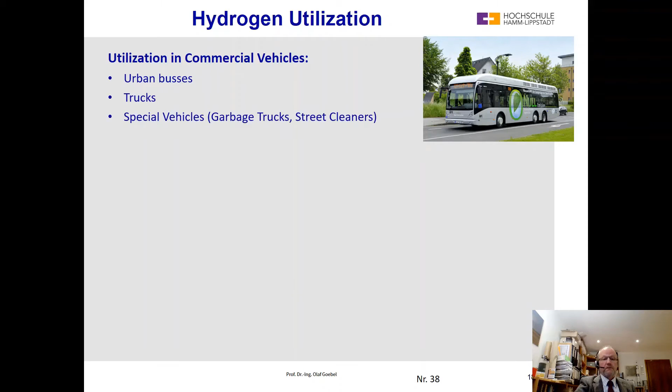Utilization in commercial vehicles, urban buses, trucks, and special vehicles like garbage trucks, street cleaners, and so on.

Advantage of hydrogen fuel cell against battery electric vehicle: you have a larger range with hydrogen, you have faster charging, and the hydrogen tank has less weight than the battery. The disadvantage of the hydrogen fuel cell vehicle against the battery electric vehicle is higher primary energy consumption, 2.5 times higher due to the round trip efficiency, and higher fuel cost, because hydrogen is more expensive per kilowatt hour than direct electricity because of the losses.

So let's look at the example of electricity or hydrogen consumption of an urban bus. The electric bus needs 160 kilowatt hours for 100 kilometers. The hydrogen fuel cell needs 8 kilograms. But the primary electricity consumption of this bus, remember we spent 50 kilowatt hours to produce 1 kilogram of hydrogen, and 50 times 8 is 400. That means the hydrogen bus is in the end consuming 400 kilowatt hours, while the electric bus is only consuming 160. Again, we have this factor of 2.5 here.

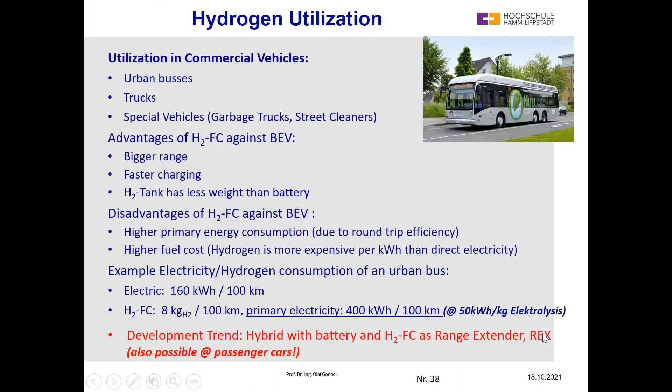The development trend, and I think this is a very clever one, is that we have a hybrid system with battery and a fuel cell as a range extender, abbreviated REX. This is also possible with passenger cars. We will see that on the next picture.

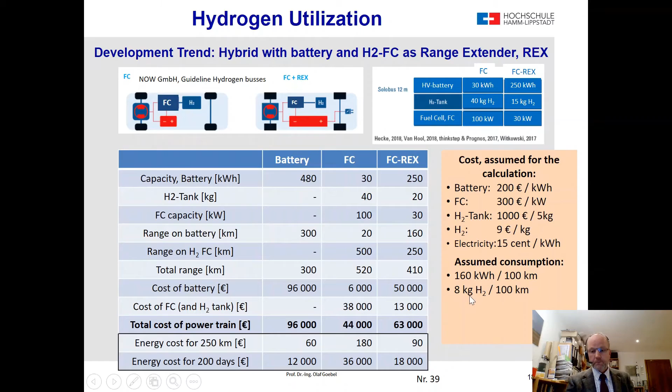So what were the assumptions here? The battery costs 200 euros per kilowatt hour. The fuel cell is 300 euro per kilowatt, which is pretty optimistic. The hydrogen tank is 1000 euro per 5 kilogram. The hydrogen cost is, like today, 9 euros per kilogram, and the electricity is 15 cents, like large consumers get it, and bus companies would be large consumers. The consumption is, for the electric bus as shown on the last page, 160 kilowatt hours of electricity, or 8 kilograms of hydrogen. By the way, the most cost-effective option would be a combustion engine REX running on biomethane - much cheaper than the fuel cell range extender.

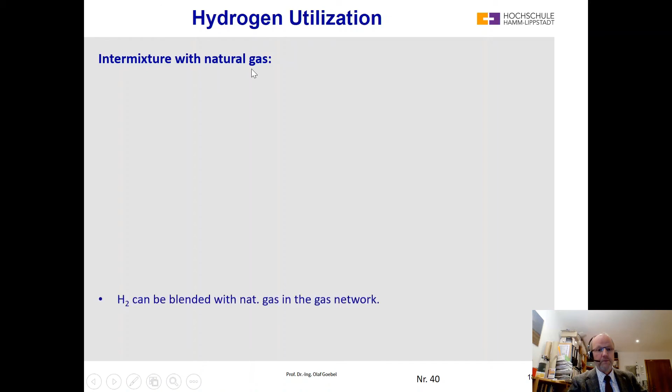Then we continue with utilization and intermixture. We can, when we produce hydrogen - which we have to do very soon, because as we continue to build wind and solar in Germany, we will have surplus energy at zero price - we have to produce hydrogen with this to create a source of income for those power plants, otherwise they are not commercially viable. So we need to produce hydrogen, and we need to do something with it. We can simply mix it with natural gas in the pipeline - hydrogen can be blended with natural gas in the gas network.

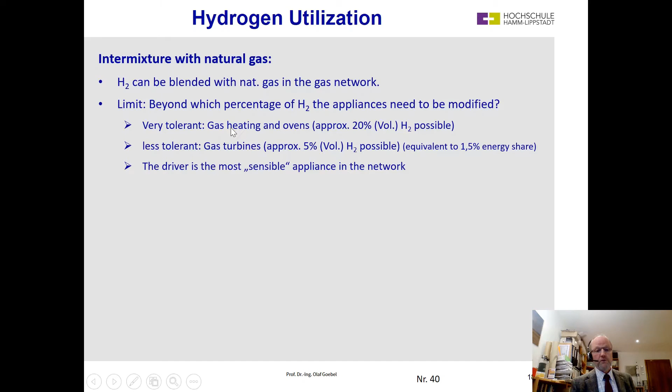The limit is the percentage of hydrogen beyond which appliances need to be modified. Gas heating systems and ovens are pretty tolerant - they easily tolerate 20 volume percent of hydrogen. Gas turbines are less tolerant - they can handle approximately 5% without modifications. And of course, the driver in the system is the most sensitive appliance in the network. So when we have a pipeline feeding households with gas heaters and gas turbines, we can only blend in as much hydrogen as the most sensitive appliance can stand.

So let's go for the 5%, which is 1.5% of energy. The German gas grid transports approximately 1,000 terawatt hours of energy every year, and 1.5% of this is 15 terawatt hours. That means we can easily put 15 terawatt hours of hydrogen into the gas network. If we produce this amount of hydrogen with an electrolyzer at 70% efficiency, we would spend 21 terawatt hours of electric energy for this - approximately 3.5% of Germany's total electricity consumption. This would be done using surplus electricity from wind and solar. If we want to consume these 21 terawatt hours for the electrolyzers over 4,000 full load hours, we would need electrolyzers of 5 gigawatt. I think that's enough for us for the next decade.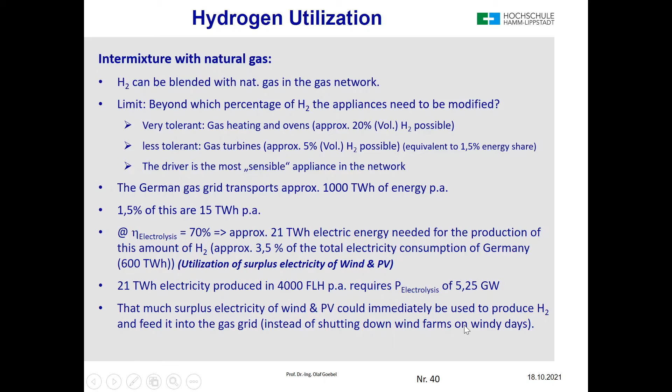By the end of this decade, we might have 5 gigawatt capacity of electrolyzers. And what can we do with this? If nobody wants it, we can simply mix it into the natural gas network and nobody will complain. As I said before, that much surplus could immediately be used to produce hydrogen and feed it into the gas grid, instead of shutting down wind farms on windy days, which is unfortunately happening more and more.

The last topic is storage - storage of hydrogen. Here, this is NASA in Cape Canaveral for the moon rocket. Here they had liquid hydrogen storage, of course, which has the highest energy density. It consumes 30% of its energy content to make it liquid.

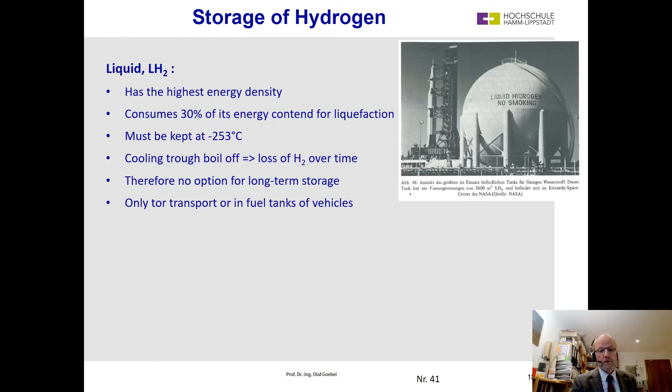It must be kept at minus 253 degrees. Cooling through boil-off means you lose hydrogen over time. Therefore, it's not an option for long-term storage. That means it's only for transport or fuel tanks of vehicles where it is used within a few days.

Then the gas pressure reservoir is mobile. You can use it mobile in carbon or steel tanks, as we saw before with the trucks. Stationary, this is a typical tank here. Steel tanks of 200 bars is the level there.

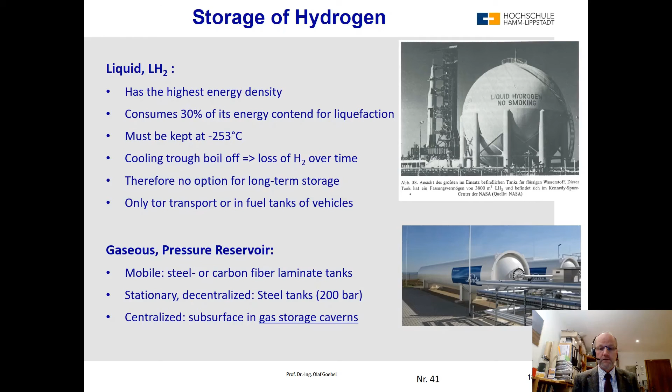And centralized large quantities then in subsurface gas storage caverns. That means you take reservoirs, which you call caverns in this case, where natural gas was before. In Germany and the Netherlands, we have a lot of those which are empty since the production has finished and run out. These caverns are available to put hydrogen into them as seasonal storage.

So many exhausted natural gas caverns are in Germany. That means seasonal storage is possible.

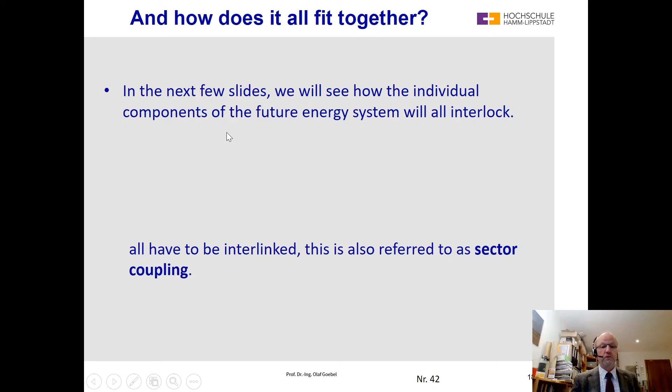So, how does all this fit together? The next few slides will show how the individual components of the future energy system will all interlock, because the sectors energy generation, transport, and heat use all have to be interlinked. This is also referred to as sector coupling.

We will go there in a second. This website, Agora Energiewende, is a very useful thing. I think very few countries have such a feature. We will go to this website in a second, but now let's look at a very windy period.

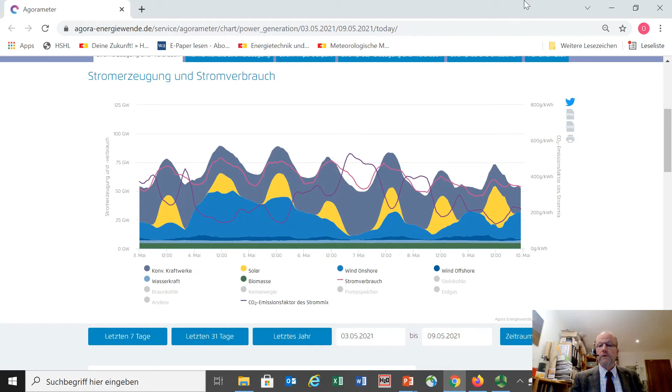So this is the Agora Energiewende website, and here you can put in dates. You can say you want to see from 3rd of May this year until the end of the week, the Sunday, and then you make display. It's also available in English. Now we see one week - 1, 2, 3, 4, 5, 6, 7 days - from 3rd of May until 9th of May. I hope this was seeable. Now we are back to the PowerPoint.

In summer, the power in the grid is to a large extent solar power, so it is very welcome if this is utilized. Even if you don't have a PV system at home, when you charge while shopping or at work, you are also charging solar energy to a large extent, and every year it will be more. The additional electricity demand at midday makes good use of the midday peak and eliminates the need for expensive intermediate storage for later use.

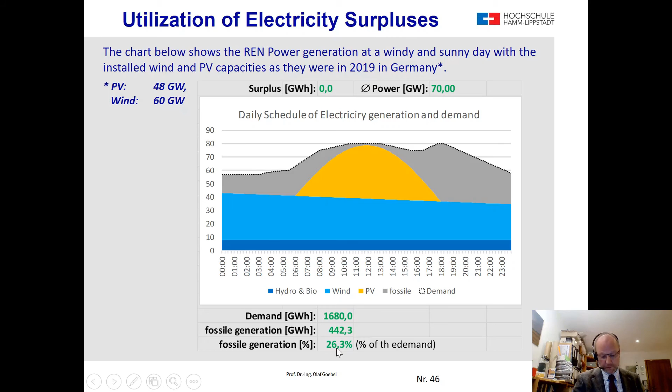This dotted line is the electricity demand of Germany, and the gray one is the fossil generation. This is measured data, a pretty sunny and pretty windy day, recorded in 2019 with 48 gigawatt solar installed and 60 gigawatt wind installed. There was no surplus. The average power was a typical day with 70 gigawatt average demand. The energy demand of the day was 1,680. The fossil generation was 442, which is 26% of the demand. So this is the situation today.

Now we will double PV. Let's say in a few years we will have managed to double the PV capacity, so this yellow bubble will be double as high. Then you see we have a surplus here, because this is the demand line, and above here is the surplus - now a surplus of 216 gigawatt hours during the daytime. By comparison, Germany's pumped storage power plants can store 33 gigawatt hours, so they would not be able to absorb this energy.

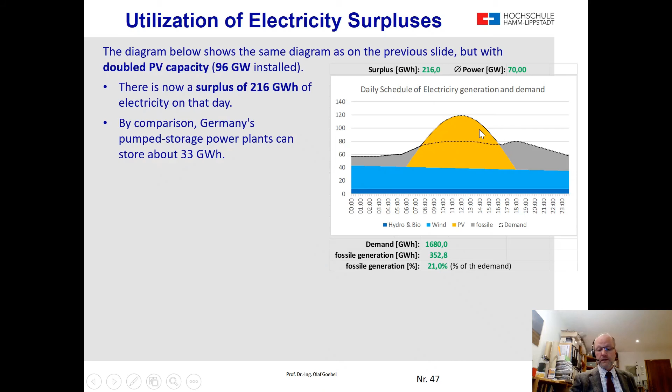What can we do with it? So pumped storage is not the solution. Question: how much electricity would all German cars need if all 40 million cars were electric? The daily mileage of the German driver is 40 kilometers a day. The consumption of an electric car is 20 kilowatt hours per 100 kilometers for a Tesla, a bigger one - smaller cars like the Renault Zoe take only 15, but let's be pessimistic and use 20. With 40 million cars in Germany, multiplying it up - 40 million cars, 40 kilometers per car, and this consumption - that means we need to charge all cars each day.

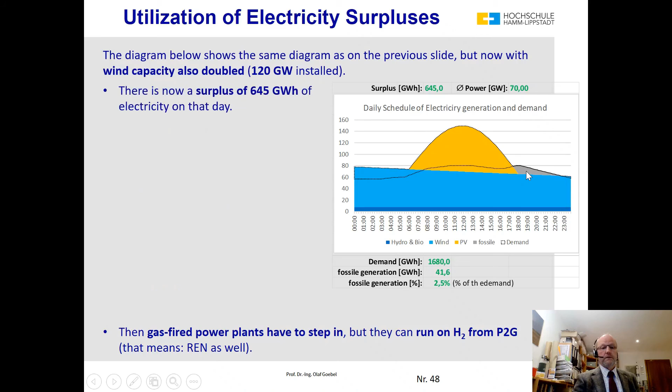The surplus on this day is 645 gigawatt hours, and the remaining fossil generation is only 2.5%. So now there is a surplus of 645 gigawatt hours. This can provide the charging current of 320 gigawatt hours for all the German cars which we calculated before, and there is still a surplus remaining of 325 gigawatt hours. This can now be used for heating, power to heat, or for hydrogen generation, power to gas. The fossil power generation, only 2.5%, can also be realized with hydrogen.

But you have to consider, the example shows a sunny and windy day. Even with high installed PV and wind capacities, there will often be less PV and wind power, because this is for pretty good wind and sunny conditions. Even with this high installation rate, you might have on some days much less than this.

And then the gas-fired power plants have to step in. In the coming years, they would have to step in with natural gas, but in the long term, they can run on hydrogen, which has been produced here from power to gas. And you see, this is how the whole system starts making sense.

The last slide before the conclusion is heat utilization as energy storage. Typically, heat generation from electricity is considered inefficient, because the electricity has been generated from heat with efficiencies between 45% in a coal-fired plant and 60% in a gas-fired plant.

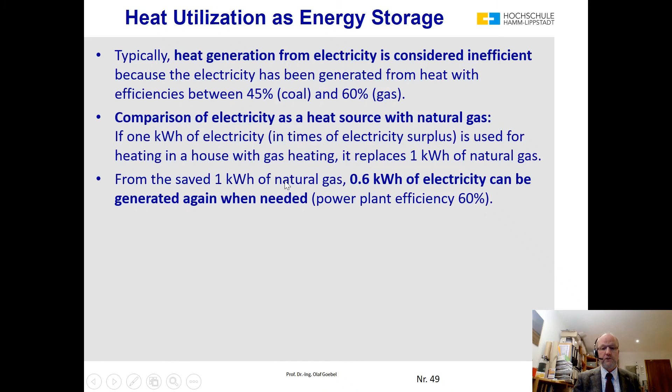From the saved 1 kilowatt hour of natural gas, later, let's say the next day when there is a lack of renewable energy, you need to burn the gas, and this saved 1 kilowatt hour of natural gas will produce 0.6 kilowatt hours of electricity. With a power plant efficiency of 60%, which is standard today, by using this heat for power-to-heat, we have a round trip efficiency of 60%, because indirectly we have saved 1 kilowatt hour of gas, which can be converted into 0.6 kilowatt hours of electricity.

If the 1 kilowatt hour of electricity were instead stored with hydrogen and then converted back to electricity via power to gas, we would only get back 0.4 kilowatt hours, because the round trip efficiency, as we saw before, is 40%. That means burning the excess electricity is more effective than storing it in hydrogen in a daily time frame.

Long term is of course difficult. The heat storage is mostly for a day or maybe 2 or 3. And the associated infrastructure, what we need here, a water tank and heating rod, is very cheap and pretty much already available in houses. And now we come to the conclusion.

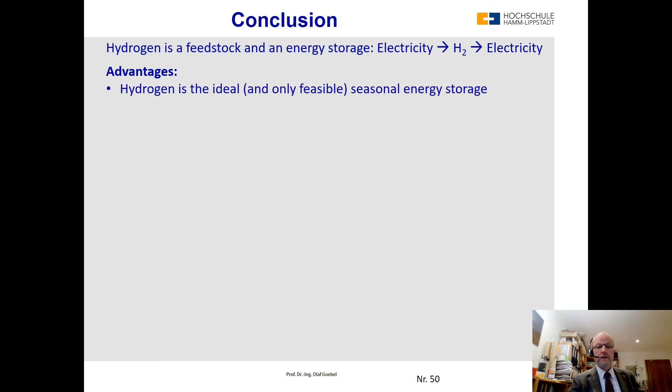Hydrogen is a feedstock and an energy storage - electricity, hydrogen, and back to electricity. Advantages: hydrogen is the ideal and only feasible seasonal energy storage. Hydrogen has a higher energy density than electricity stored in batteries, so it is well suited for powering heavy vehicles.

Disadvantages: the round-trip efficiency is less than 40%. Transportation of hydrogen is more expensive than that of oil or gas. Remember that the truck is only bringing 10% of the energy compared to an oil road tanker.

Conclusion: hydrogen is an important element of the energy transition for sector coupling. The first big market for green hydrogen will be utilization as a feedstock for the chemical industry, where hydrogen is already used today. Where hydrogen will prevail over direct electricity use remains to be seen.

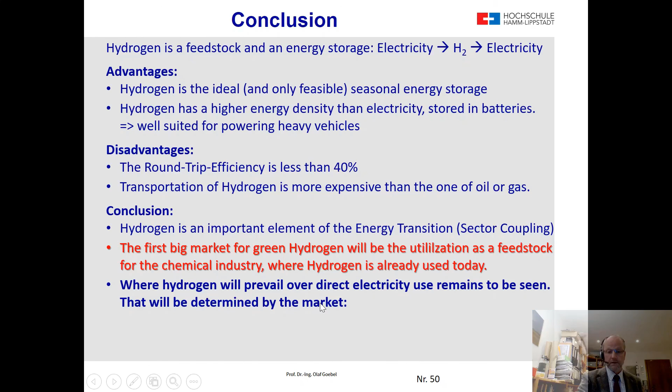That will be determined by the market with the following steps. Let's say we have a lot of renewable electricity - there is an electricity surplus, meaning a lot of cheap electricity for electrolyzers. If there are many hydrogen users, because there is cheap hydrogen in the market, electrolyzers will need more than just the surplus electricity, because they have to run many hours, also in hours where it's not a surplus but where electricity needs to be specially generated for them.

That means the hydrogen price will rise again and the number of hydrogen users will go down again. This is the balance which will show whether the direct use of electricity or the stored use via hydrogen will be more prevalent. Of course both will have their place, but how the percentage will be in the end will be shown in the future. So we have to be very flexible and react to the signals which the market will send us.

The last slide shows a literature selection. This is unfortunately all in German language. So if you really want to become a hydrogen expert, I think German is a useful language, but there's also, of course, a lot of English-speaking literature available.